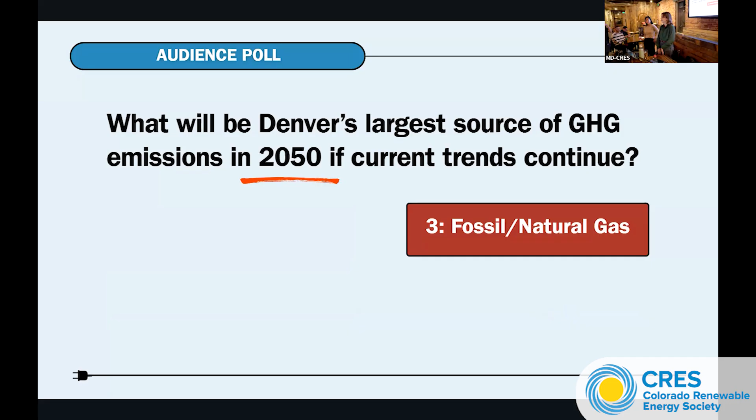We're seeing some threes, a couple twos, some threes and two over here, got one over here. All right, some different. Okay, so the answer is 3, fossil gas, more commonly known as natural gas, but we'll be referring to it as fossil gas tonight. So now we're going to dig into Denver's climate goals in the surrounding policy context to explain why this will be the case if action isn't taken now.

So Denver has a goal of reaching net zero emissions by the year 2040, but the problem is that their fossil gas emissions are projected to remain the same as they are now through the year 2050 at 1.9 million metric tons of carbon dioxide equivalent. So from now until that year, they're expected to just completely plateau. And by that point in time, as you can see on the chart, fossil gas will make up the vast majority of Denver's emissions.

Everything else listed here is expected to get cleaner over time as the grid continues to be decarbonized, but fossil gas isn't something that gets cleaner over time, so we need to replace it with something else. So that led our team to a key question. How can CASR and Denver help manage a transition off of fossil gas to reduce emissions and costs while also ensuring equity?

Luckily for CASR, there's been plenty of action at the state level, and HB 24-1370 in particular is the bill that's actively been driving our capstone forward. So this bill requires the utility Xcel Energy to partner with Denver to explore neighborhood scale electrification pilots. And these pilots should be getting majority buy-in from the participants. Yep. But before we get into all of that, we wanted to give just the most high level and briefest overview of our current fossil gas system.

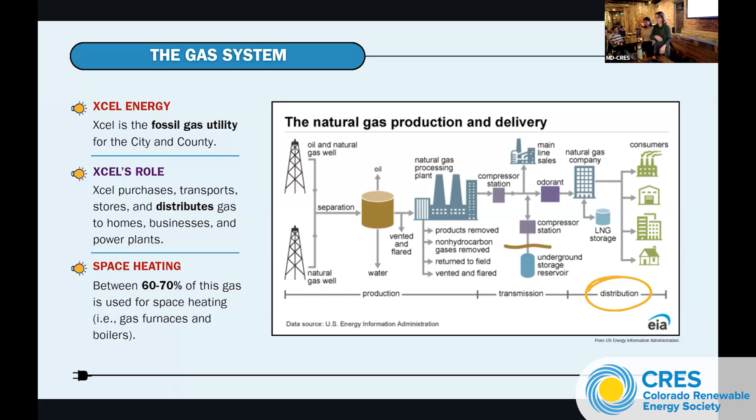But now to get into the actual title of our presentation, we're going to look at what neighborhood scale electrification actually is. So this is an approach that seeks to electrify entire neighborhoods or areas all at once, rather than going about it in a more randomized, piecemeal fashion. So to give an example, hopefully you can see behind my head.

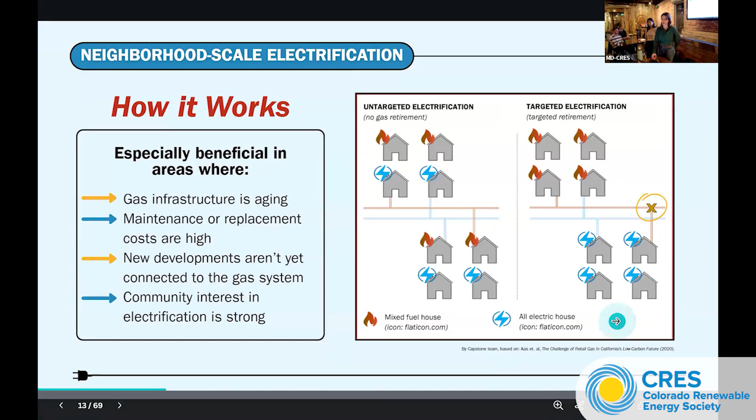So this approach works really well in areas where there's old infrastructure that's expensive to maintain or replace, and new or planned developments that haven't yet connected to the gas system, and also where people are interested in electrifying in the first place. Yep. So I just mentioned some of the benefits of this approach. Our team also identified all of these other co-benefits, and there's probably a few more. But the one that we really wanted to highlight for you all tonight is this last one.

So neighborhood scale electrification can help CASR and Xcel tackle the energy burden. As more and more people are electrifying, the costs of maintaining and investing in the gas system get spread across fewer and fewer customers. So that means higher utility bills for the people that are left behind. Since it's mostly higher income households that are able to electrify right now, this approach would help CASR and Xcel prioritize those lower to middle income neighborhoods so they don't get stuck with the rising costs of the gas system.

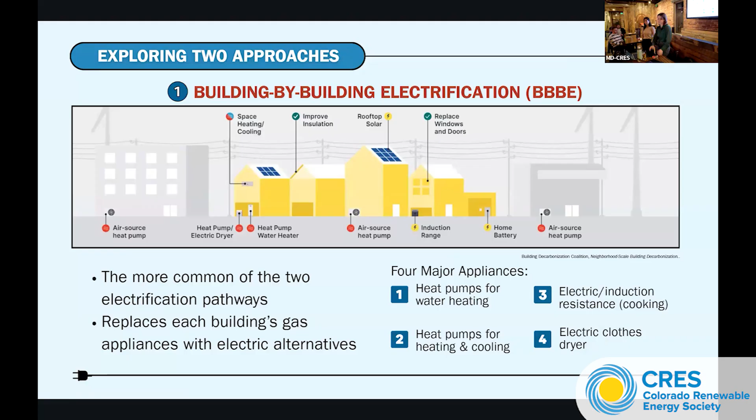Now, our team explored 2 different pathways to get to neighborhood scale electrification. One of them being building by building electrification, which entails just taking all of the systems and appliances in a building and electrifying them. So it's mainly air source heat pumps as well as heat pump water heaters. The second pathway that we looked into are thermal energy networks, or TENS. And this is the pathway that we're recommending CASR prioritize in these future pilot projects.

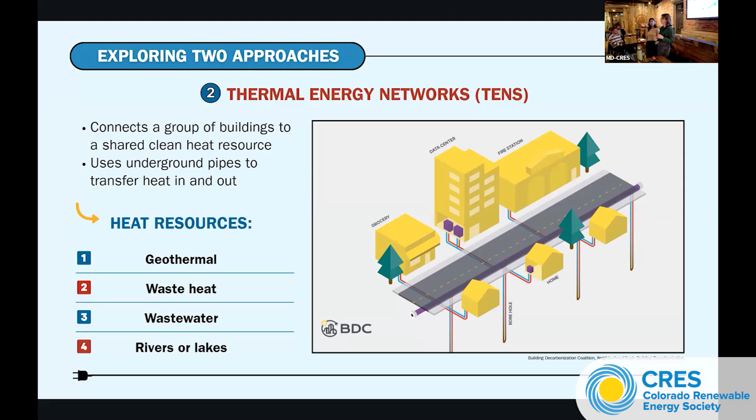So TENS connect a group of buildings to a shared clean heat resource, like one of the ones listed here. And they do this using underground pipes and heat pumps to exchange heat between buildings and in and out of buildings. And since data centers have been a very popular topic among environmentalists, we wanted to focus on that in this graphic. So one potential solution to the data center problem is to connect them to a TENS.

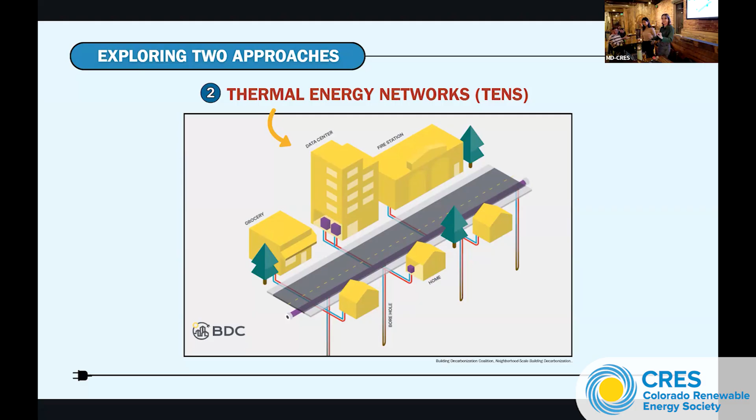They produce tons of waste heat because they're constantly running 24/7. But connected to a TENS, you can take all of that waste heat, convert it to useful heat, and then funnel that heat to other buildings on the network that need it. So this would be especially helpful in the winter when our residential fossil gas demand hits its peak. And the graphic is being modest, probably for simplicity's sake, but the reality is that if you connect a data center to a TENS, it could provide the heating for hundreds, if not thousands of homes. So we're not advocating for more data centers, but this is a way to get around it.

But how do TENS compare? As of right now, fossil gas on average is about 3 times cheaper per unit of energy than electricity is. So heat pumps have to make up for that cost differential through their efficiencies. And TENS do this especially well. That's because TENS typically use ground source heat pumps that are able to tap into the Earth's stable underground temperatures that are around 50 to 60 degrees.

Non-networked air source heat pumps, on the other hand, have to work a lot harder to bridge a much larger temperature gap between the outdoor air, especially in the winter months, and the desired indoor air temperature. But ground source heat pumps only ever have to make a 10 to 20 degree jump, so that raises their efficiencies. If you connect a ground source heat pump to a TENS, they can reach efficiencies as high as 600%. And then compared to a non-networked air source heat pump at around 250% efficiency, and then a regular gas furnace at about 99 to 100% efficiency.

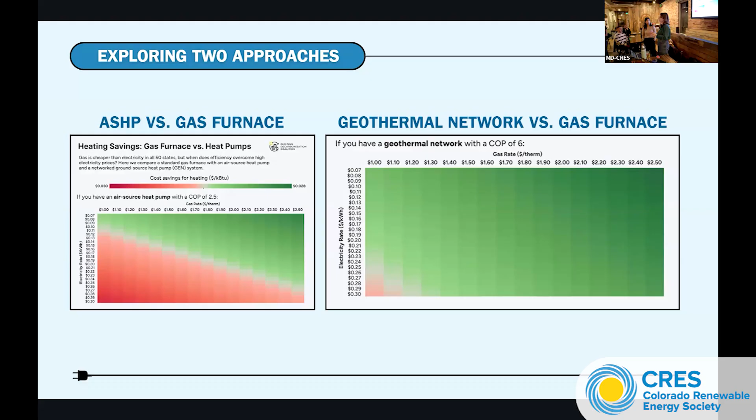So starting with the left, as you can see, it's pretty split between red and green. So when electricity prices are higher and gas prices are lower, the non-networked air source heat pump will be the more expensive option unless electricity prices fall or gas prices rise. But on the right side, as you can see, the graph is mostly green. So even with the higher electricity prices and the lower gas prices, geothermal networks have such incredibly high efficiencies that they more than make up for that cost differential, and they're the most cost-effective option most of the time.

So now I'm going to hand it off to Mariah and Lisa to walk us through some of the deliverables. So yeah, I'm going to talk about our deliverables that we created for our partner at CASR.

So we did a lot of research. We looked into a lot of policies. We created some reference documents for them to look at. But what we're going to talk about today is the neighborhood profiles, electrification case studies, our home energy survey, and are we going to talk about educational materials? Yes, we are going to talk about educational materials. So

for CASR to effectively work on neighborhood scale electrification in Denver, we really need to understand Denver's personality. And we started by creating 2 scoring systems. The first is our need-based scoring system. We use the demographic scores from Denver's EnviroScreen system, which if you're not familiar with it, just takes a whole bunch of variables and gives different areas a score of their environmental risk. So we just took the demographic portion of that scoring system and combined it with an extreme heat vulnerability score from the census, the sensitive populations and environmental exposures data we used was from Colorado's equity score.

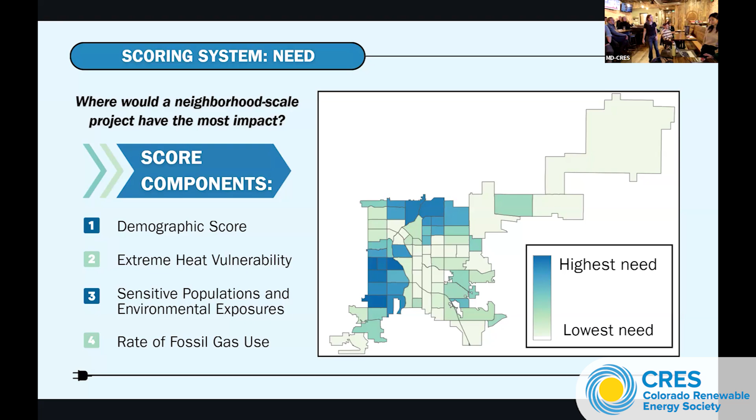And then we used just the rate of fossil gas usage in those neighborhoods. And if you're familiar with Denver, you'll recognize the inverted L shape that basically shows where there's been a lot of historical marginalization and disinvestment in those communities. And the other thing we wanted to know is what kind of project would be most likely to succeed in this part of town. So we looked at population density, with a higher population density being correlated

to more success. I dropped that information. Wow, that's okay. I'm just gonna roll right along.

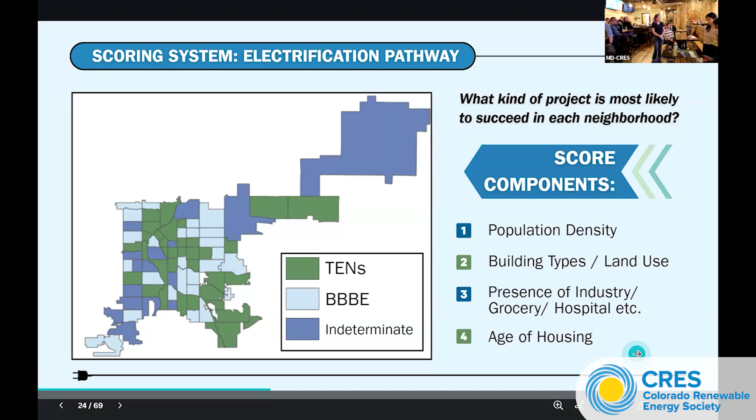Building types and land use, mixed use is more successful for a thermal network. A purely residential neighborhood is gonna be more successful with building by building electrification. The presence of industry, groceries, hospitals, and schools provide heat sources for thermal networks. And the age of the housing, older housing tends to be less efficient and also is correlated with an older gas pipeline system. We don't have access to Xcel's gas pipeline information, so we had to use some proxies for that. So using that, we picked 5 neighborhoods to do a really deep dive on.

I'm going to start by talking about Denver's Westwood neighborhood, which is a neighborhood that I have a strong connection to because I used to teach preschool there. So as you can see, Westwood is right in that inverted L shape. And we categorized Westwood as being a good fit for a thermal network because it has high density. There you go. And because of the presence of certain sources of heat, but there are also some barriers, which we'll talk about in a minute.

And Westwood is a Colorado creative district. There's some beautiful public art, murals, strong Latina culture. 37% of this neighborhood is under the age of 18, which is the second highest in Denver. And what does that mean for electrification projects? Westwood's young population is particularly vulnerable to the health impacts of fossil gas, which are things like asthma and respiratory issues, with carbon monoxide moving all the way up to death. But let's just go right past that.

But 80% of Westwood's residents rent their homes, and that's a huge barrier for any kind of electrification project. Westwood residents have lower than the Denver average income and higher than the Denver average cost burden, which cost burden is when you spend 30% of your income or more on housing. And finally, 2/3 of the homes in Westwood were built prior to 1960. This means that those older homes probably correlate with an old gas pipeline infrastructure, and the time could be right to replace those old pipes with something different.

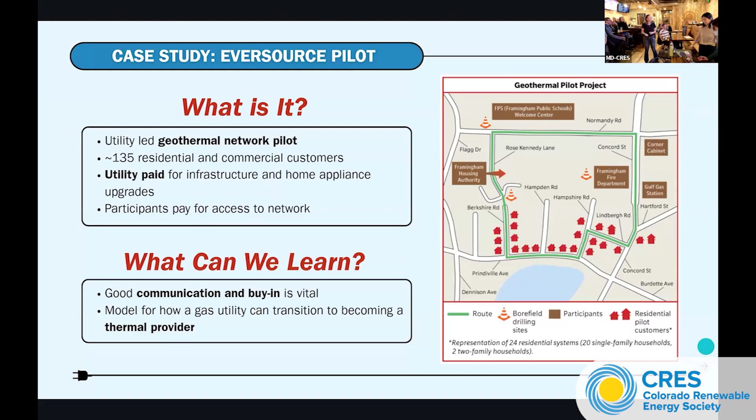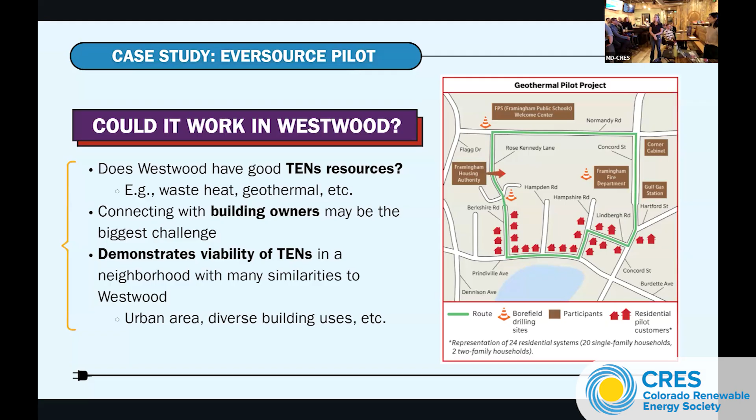And could it work in Westwood? Maybe. Colorado has good geothermal resources. There are some other sources of heat in Westwood as well, but connecting with the building owners could be the biggest challenge here. The thing is, the way the gas infrastructure is set up, if you can get even just a few buildings on the terminal end of a gas pipeline, you can still make a big impact by being able to remove that piece of pipeline from the system. And that's what we think CASR should prioritize in a community like this.

And then we're going to talk about the complete opposite of Westwood, which is Central Park. So Central Park, if you're not familiar with the history, Denver's airport used to be there, the Stapleton Airport, and Central Park is considered one of the nation's largest and most successful infill developments. A lot of thought went into planning this community. There is a master plan with a focus on sustainability.

People in Central Park tend to have higher incomes, but that comes with also a very high cost of living. So there are still many residents in Central Park who experience cost burden. Some areas of Central Park actually technically qualify as food deserts because they are more than a mile from the nearest grocery store. What does electrification look like in Central Park?

Because of its history as an infill development, most of the houses are the same age. About 15 or 20 years old, which means almost all of them will be reaching the end of the life of their first set of appliances. This represents a really big opportunity to do a group buying scheme and capitalize on economies of scale to get a neighborhood to electrify all at once.

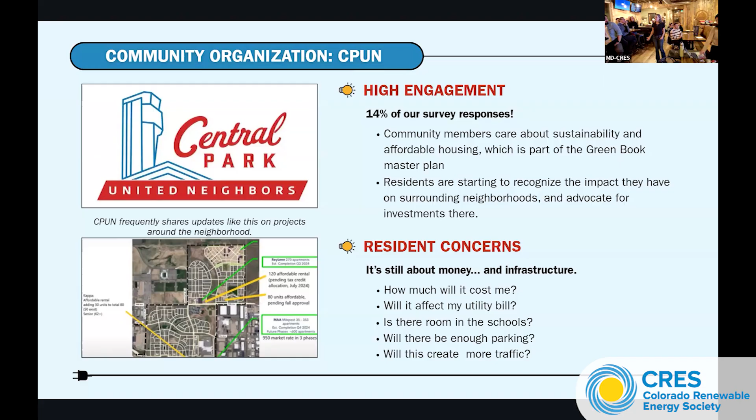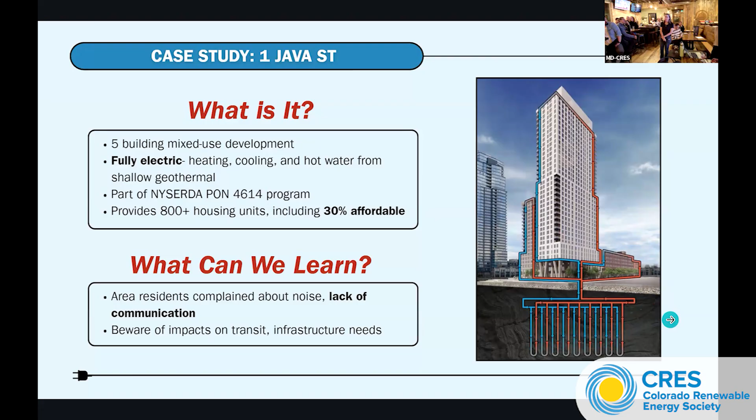And then could it work in Central Park? I think yes. This would actually be easier to do here than in New York because we don't have the space constraints that New York has. We wouldn't have to keep our boreholes all within the footprint. We could use parking lots and spread out and get even more out of it.

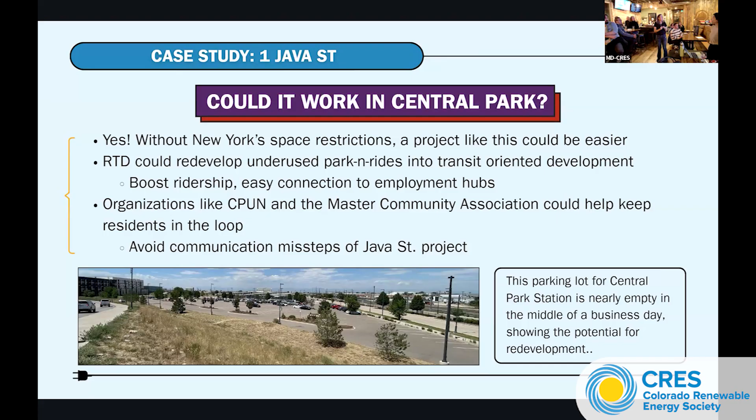The park and rides that RTD built with the FasTracks programs sit empty a ton of the time. This picture is from a business day on a Monday. So if we rebuilt this as transit-oriented development, it could boost ridership. There are easy connections to employment hubs like the airport and downtown. We just want to keep the residents in the loop.

And we need to know if the residents want these projects at all, which leads me to Lisa and our home energy survey. Okay, so we surveyed Denver neighborhoods to better understand residents' attitudes and knowledge about electrification. And so we received nearly 200 responses, with the majority being single-family homeowners. And this is quite significant because lots of pilot projects focus in on single-family homeowners, meaning that our survey closely aligns with successful projects done in the past.

But it's really important to note that our survey is not representative of the entirety of Denver. For instance, we received really limited responses from neighborhoods like Westwood, which have a high proportion of renters. So it's really important for CASR to focus in on renters moving forward.

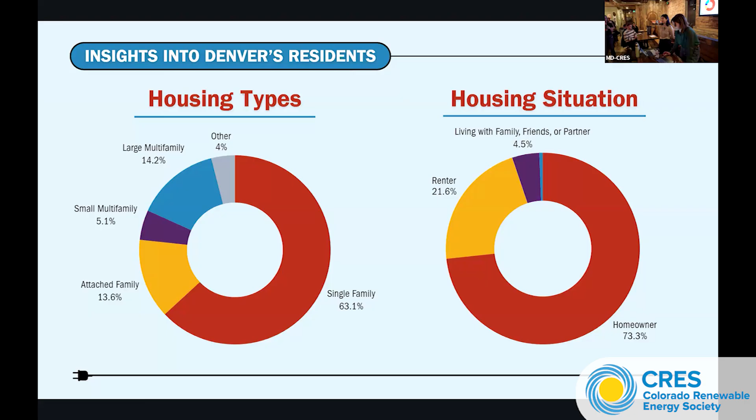So our team engaged attitudes towards electric appliance adoption, particularly residents interested in switching their natural gas appliances to electric alternatives like induction stoves. And so about 50% answered that they would be very interested in switching now. But when asked if the full cost was covered, that number then jumped up to 65%, showing that cost still remains one of the biggest barriers to implementation.

But for the 50% of respondents that said that they were not interested in switching now, the top two barriers were really clear. First being high cost, and second being reluctance to replace their current appliances before their end-of-life use. And so what would help these residents move forward? Well, our survey found that mostly they needed financial incentives and information about cost savings using things like community events and workshops where residents can ask questions and learn from us directly.

And so that takes us to our educational materials that we made to help residents move forward. And so we made materials adapted to different audience members: property owners, renters, and community organizations. So for property owners, the focus was on healthier buildings, greater cost savings, and higher property values. We listed steps to take before, during, and after electrifying, and included pictures of different systems, appliances to consider electrifying, and shared links and access to rebates and incentives that they could use from the city.

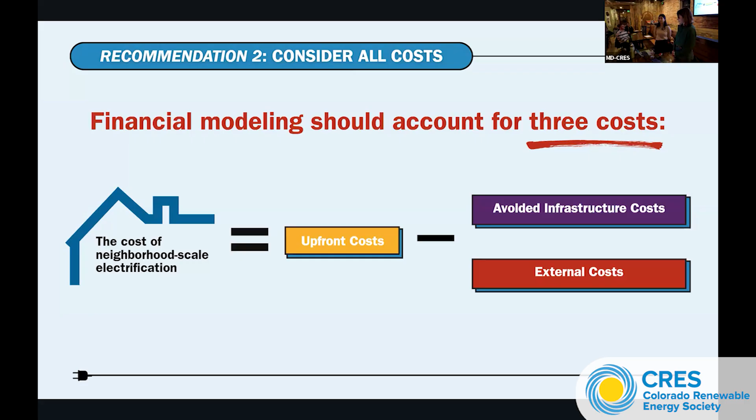And the third focuses around policy reforms. And while CASR is not a policy-making entity, it holds a lot of influence, especially as other municipalities look to Denver as a climate leader. So the first is that current projects do not require a 100% buy-in, but they strongly recommend it. But this can be a barrier to implementation. So we recommend lowering that threshold to a 2/3 majority.

The second is to protect renters. And so banning those pass-through costs for electrification retrofits and requiring contracts to be made before the project starts. And the third is requiring Xcel to share that pipeline information so that these projects can get started.

And our fourth and last recommendation centers around community engagement best practices. And so the first is to partner with trusted community-based organizations like local nonprofits, faith groups, and neighborhood associations like we talked about, who already have that relationship and built trust with residents.

The second is that the language really matters, and so adapt those materials to fit the various community needs and simplify the language so that it reaches a broader audience. And the third is to start early, stay consistent, and follow through. So bring in those residents and key stakeholders early on during the planning phase and maintain that ongoing dialogue throughout the project.

At the end of last month, Denver and the other municipalities that are participating in HB 24-1370 have reached an agreement with Xcel on how to move forward. And now they'll start evaluating potential pilot projects. Our research should form the groundwork to help them choose projects that have a high probability of success.

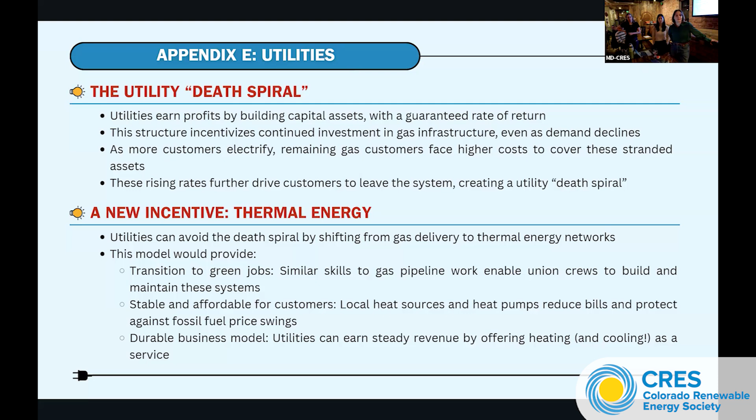Oh, sorry if I missed it. Did you put together some gross costs for this? Maybe I missed it on the slides. Like how much per house would this investment cost? Down maybe to that granularity.

Yeah, we have to. Sorry, he's talking before. Oh, I'm getting confused with all of them.

So for your comment first, that's why our team advocates to prioritize TENs, because with air source heat pumps, you're putting way more strain on the grid, especially during those peak times. But thermal energy networks, with their higher efficiencies, you're not straining the grid as much. The electricity use is way less because they're way more efficient. And then this is the data we have from the geothermal pilot in Framingham. Oops, sorry.

So yeah, the upfront costs are pretty hefty. Eversource took on all of these costs. It's, I think, about 2 years since they finished construction. Maybe it's not even that long. So it remains to be seen how this has affected the other ratepayers for that utility.

But I think the good news is that cost of gas that we have right there, anywhere between 1 to 10 million to replace 1 mile. This was 14 million for 1 mile, but it was also one of the first ones that we did. So I think if we keep up the learning curve, hopefully those costs will go down.

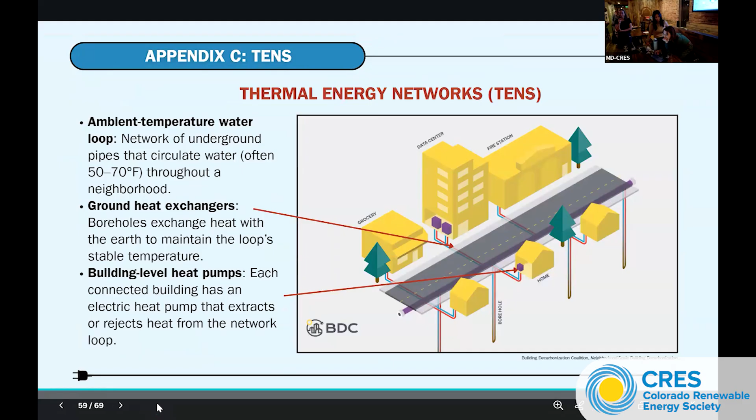I don't know if you've ever been around a drilling project, but they were drilling 300-plus 500-foot holes in the ground. And I would say the problem wasn't so much the actual noise, because that's going to happen in a project like this. There is absolutely no way to avoid it. But the problem was that they didn't let the neighbors know when to expect noise or when to expect it to end. So it's not noisy when it's done, just when you're building it, like construction sites are, I would assume.

Sorry, this is more just a comment, but I think that's a complaint across the board, even with solar development, is the community is not engaged early enough. And there's 400 trucks driving up and down the roads every single day, and there's dust and there's noise. And yeah, I think we need to learn how to engage communities early.